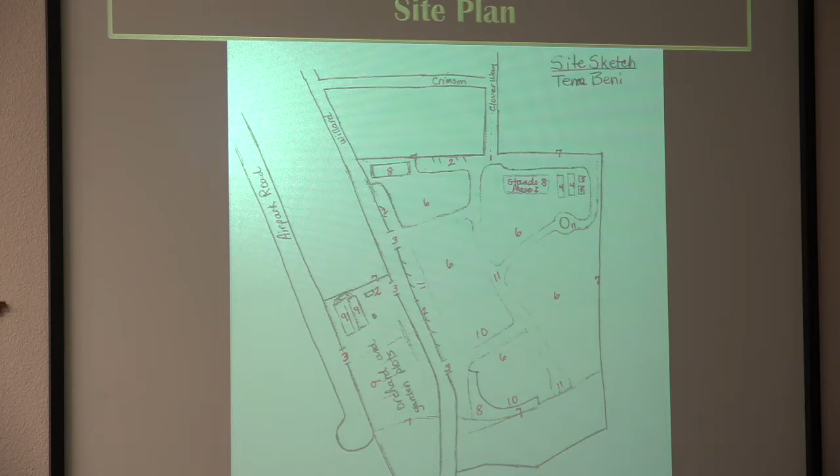So there is pretty significant overgrowth that's still occurring. That concludes what I have to say. As I said, the applicant has stated she would not be here this evening, and would rather come back to you with more of an update in November or December. That's the information I have, and I'll pass it on to you — available for any questions.

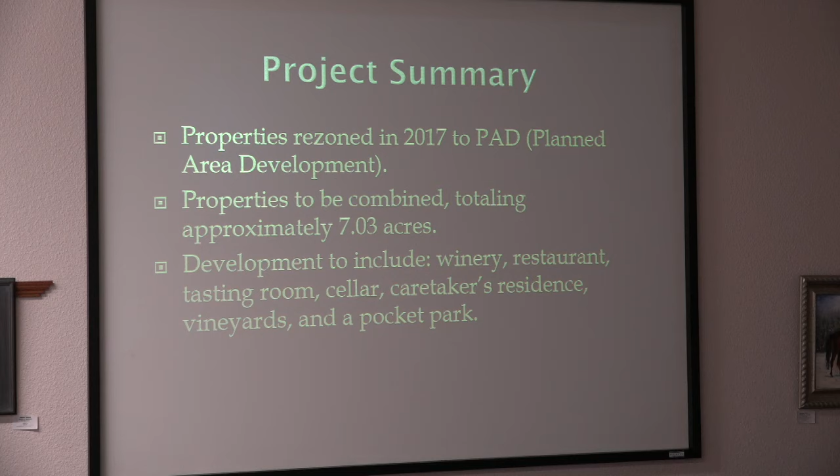Right now it does consist of 2 parcels, this larger one here and the smaller one down here on the corner. They will be combined before the project moves forward. It's approximately 7.03 acres once combined. The project will include a winery, a restaurant, tasting room, cellar, caretaker's residence, vineyards, and a pocket park. That pocket park would be down here, kind of in the corner below the hill where you see the other parcel. It's going to have 2 containers for ice cream, gelato, coffee, and places to sit down there for customers.

As I mentioned, they're going to reuse portions of the existing building. Vehicle access will be from the existing driveway along Verde Heights, which will be improved to required standards. They have 76 parking stalls on site, including 1 down below for ADA at the pocket park. It does exceed the requirements of the parking ordinance. They will provide walking access to the restaurant from Old Town via a stairway through the terrace vineyards, and also an incline lift will provide access from the pocket park to the restaurant.

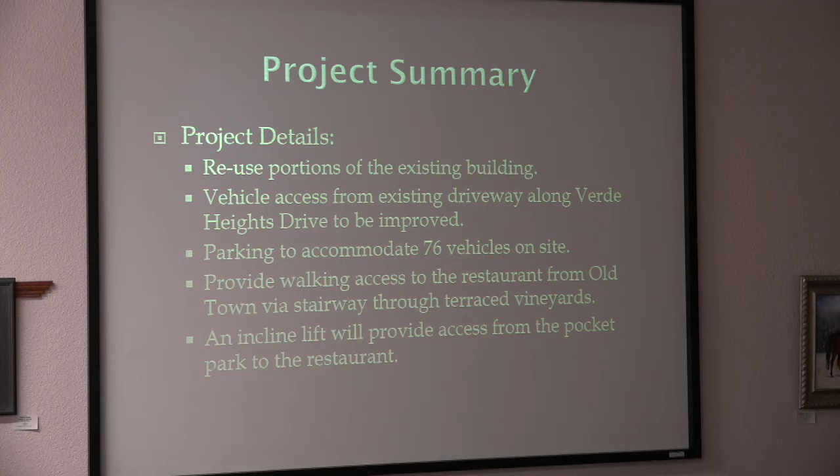There will be a walkway from the top of Verde Heights to Old Town that's still being discussed between the applicant and the staff, the city engineer. Right now there's talk about allowing public access through the property while they're open. When they're not open, during their hours of operation, they're closed. There's no easy access from Verde Heights to Old Town, so we're still trying to figure out what that is going to be. That is a stipulation on the staff report if you choose to approve it tonight, that they get that figured out with city staff, with the city engineer, to accommodate that public access.

The off-site improvements will include curb and gutter along Verde Heights. That's the extent of the improvements that are required. Unfortunately, the city engineer was unable to make it tonight. He had planned on it, but he just couldn't be here. So it will be curb and gutter, and again that other walking path, it's not necessarily going to be a full sidewalk. Again, they're going to work that out. So that is the extent of improvements on Verde Heights Drive that the city engineer can require.

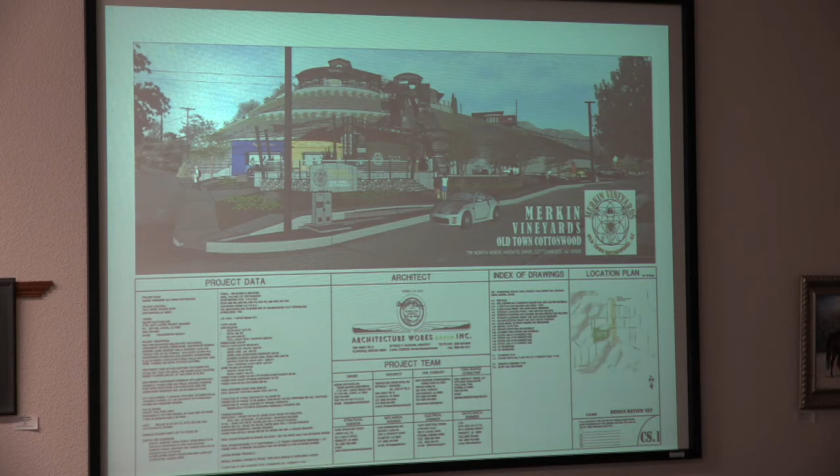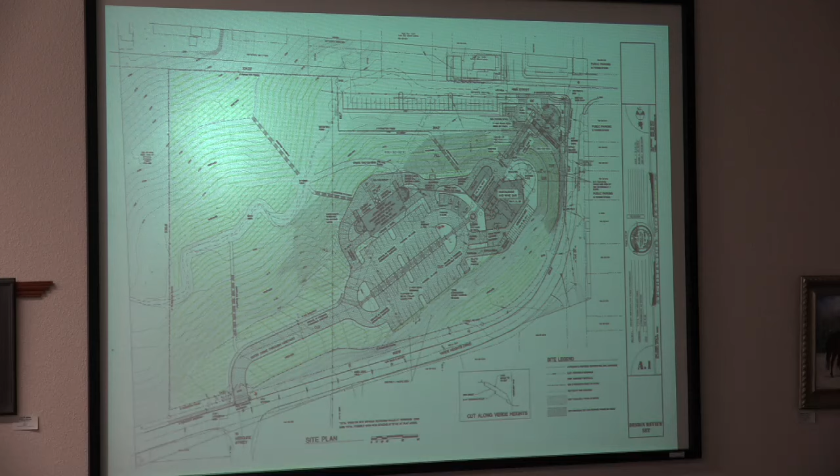Site plan showing the layout of the property with your pocket park down here on the corner, the incline lift coming up here, as well as the stairway, the restaurant in this area with the greenhouse, parking throughout the area over here, the access up Verde Heights up here on top of the hill.

I would like to also point out on their landscape plan, this area right here is extremely steep. It's not very easy to plant anything in that area. Had it been, they would have shown that. They will be landscaping the majority of the frontage along Verde Heights up here, along the entrance here, and there will be around the rest of the property over here as well. It's just this area right here is very, very steep. They're gonna leave it mostly natural as much as they can, but they just can't go in there and plant anything. The applicant is here tonight, and they can go into more detail on that if you'd like.

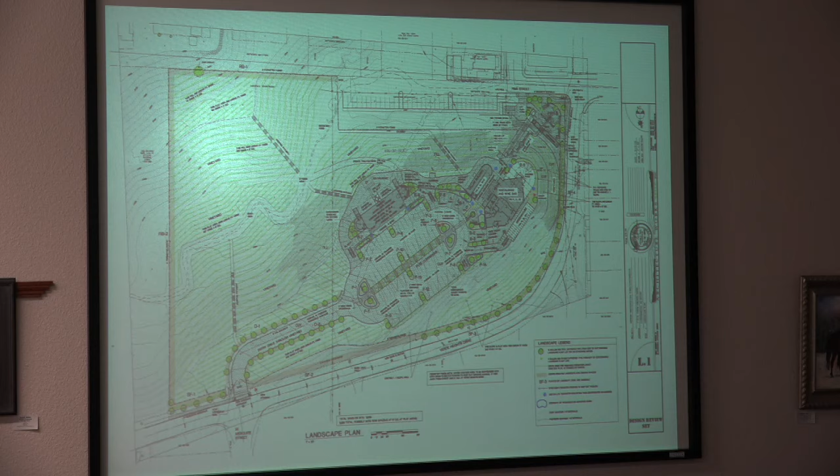There will be terraced vineyards throughout the hillside through here, around over here, on the backside, looking at as much as they can on vineyards there. Try and collect as much rainwater as they can for irrigation, and also using city water as well.

That's kind of a little layout floor plan of the restaurant area, the greenhouse over here. Caretaker's residence to be over here with the winery. And down here is the pocket park in this area.

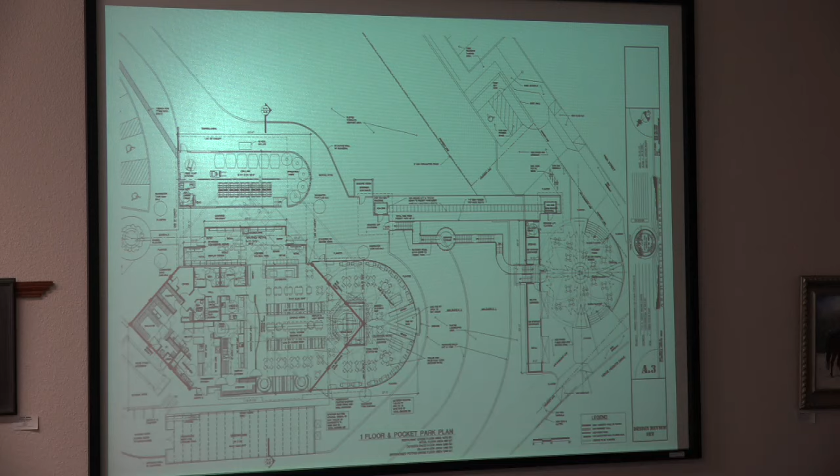There will be a sidewalk on the corner down here that goes around up to a portion of Verde Heights right there, but after that, they can't extend it up there due to the nature of Verde Heights Drive.

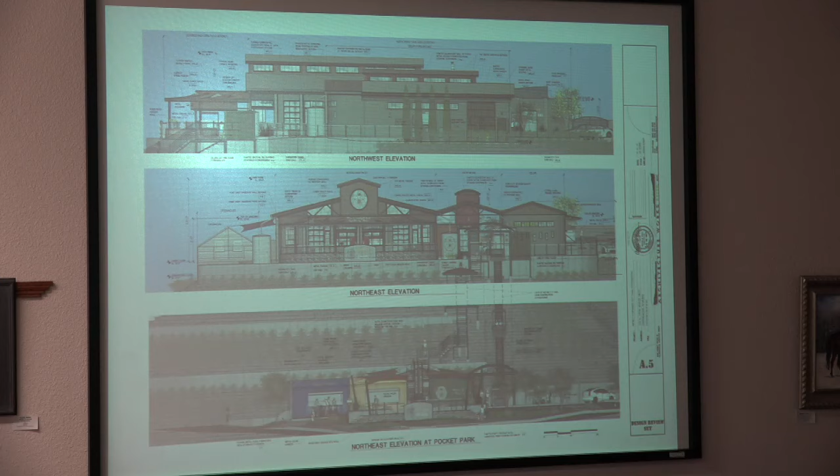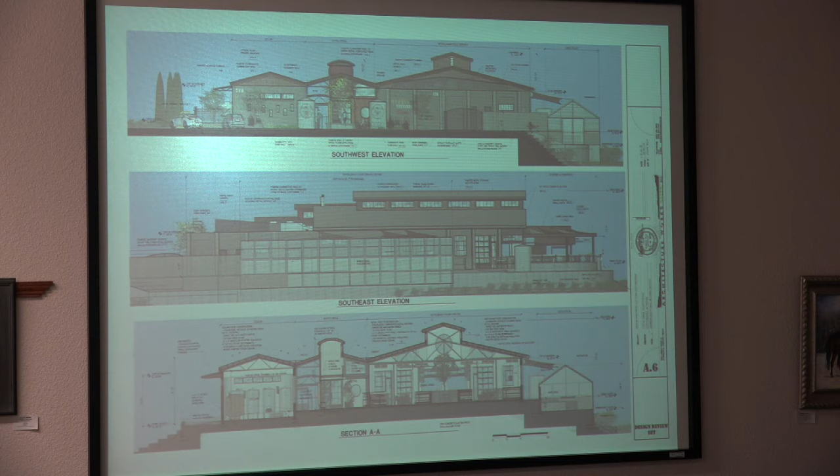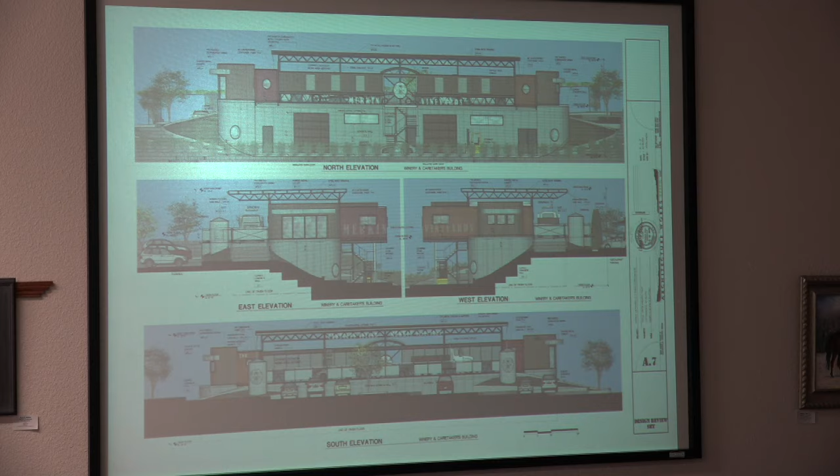And other north and west elevations, and then also on the east and south. That's the winery and caretakers building, elevations on there.

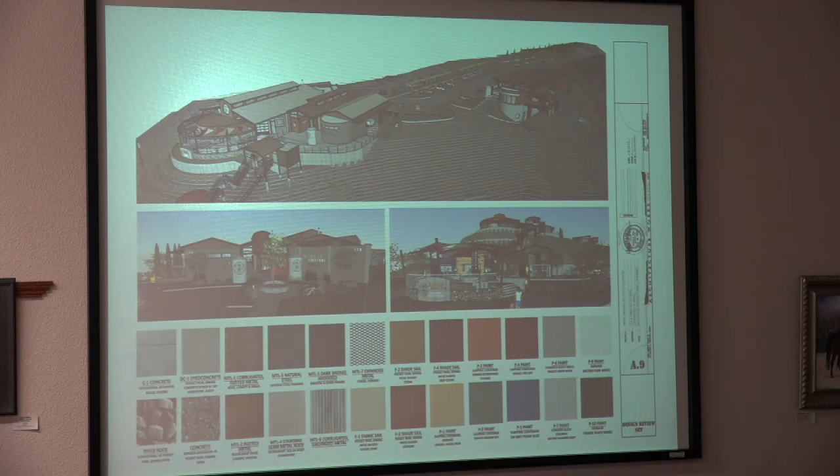That's their renderings with their color palette. They do have samples, material samples here tonight. If you'd like to see them, we can get them passed around to you. Also their boards here to view.

Their signage, staff is still looking at it to determine if it meets the sign code. There's some questions that we need to sit down with the applicant to determine what their uses are versus what they're allowed. So we're gonna sit down with the applicant, go over that so we can accurately determine what they're trying to do, what signs they're allowed to have, and if they're over or under, and where those signs could be placed. So we've got a lot going on there right now, so we just want to ensure that what they do meets code, because they are allowed a certain number of signs per use, not necessarily per property, but per use, and they will have multiple uses on this site.

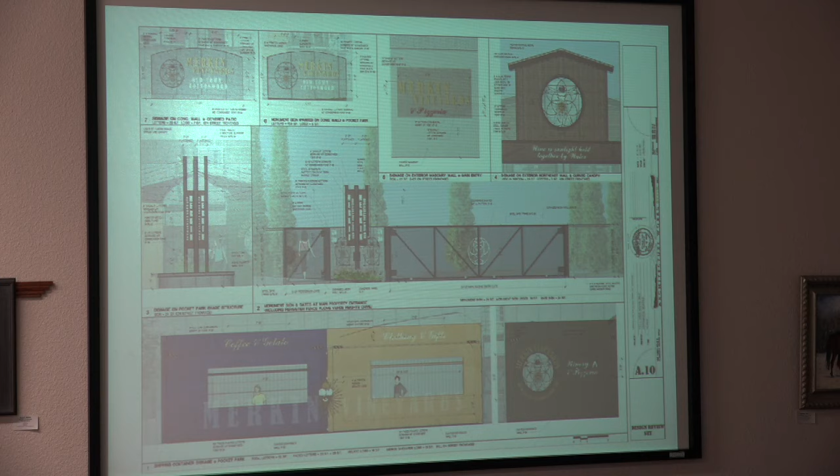Again, some examples of the signs that they might use on the containers here, on the entrances.

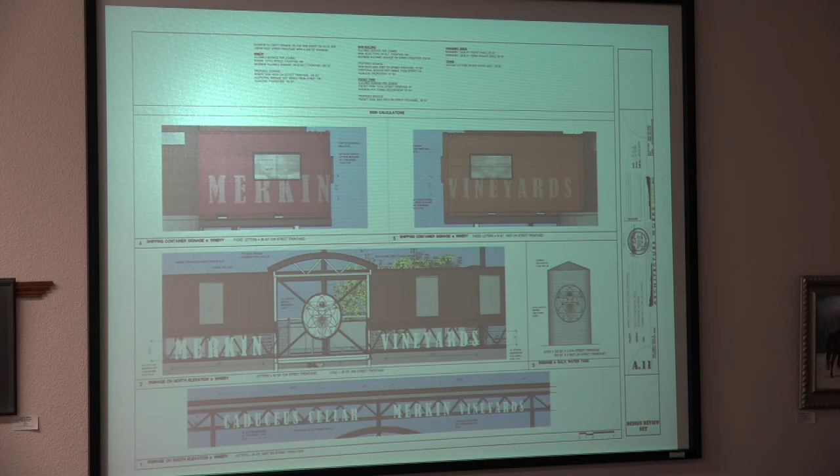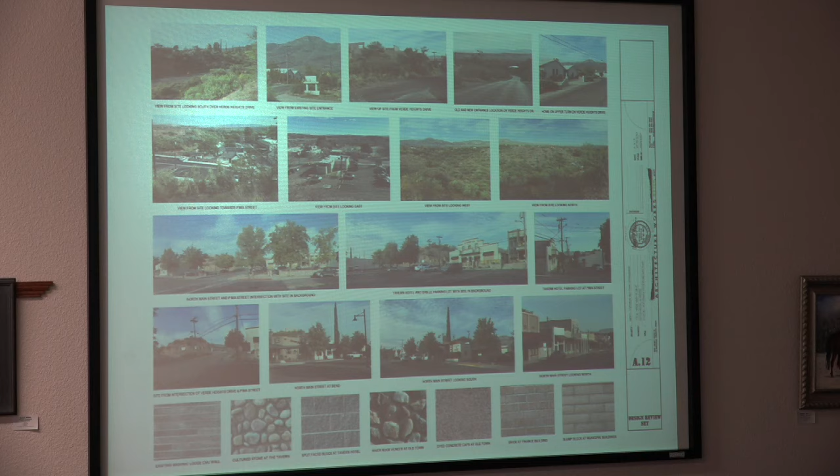There's some before and after looking from Main Street. That's what it looked like before there was some demolition on the property, and then what you would see after completion of the project.

This project is proposed to be phased over the course of the next couple of years. Back in August, the Planning and Zoning Commission and City Council granted an extension, a phased extension of this project timeline to go to, I believe, March of 2022, or it might have been June of 2022. But it gives them a 3-year phasing plan on this to complete the project.

There's another before and after view looking at it from Cactus Street. This is the view from Verde Heights, before and after. There's the entrance gate here.

As you can see, this fence, this 8-foot fence that they're requesting to go around the property here for protection. Another photo from Main Street.

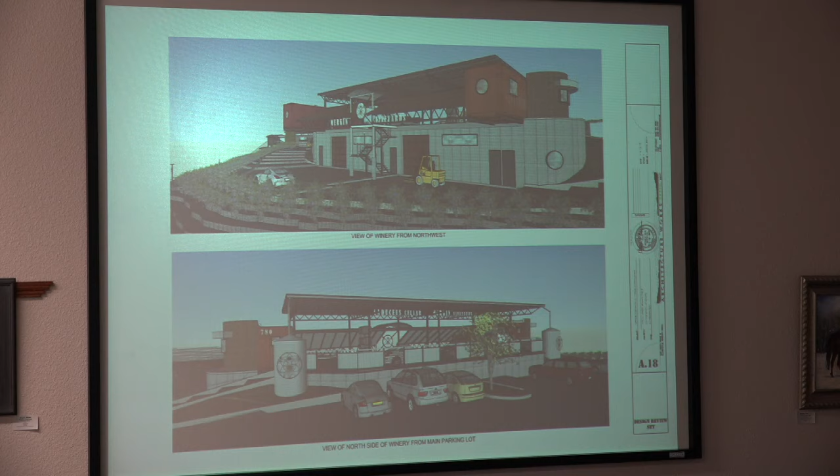This is the winery view from the northwest and from the parking lot. And that's again the fence elevation from the perimeter fence around the property.

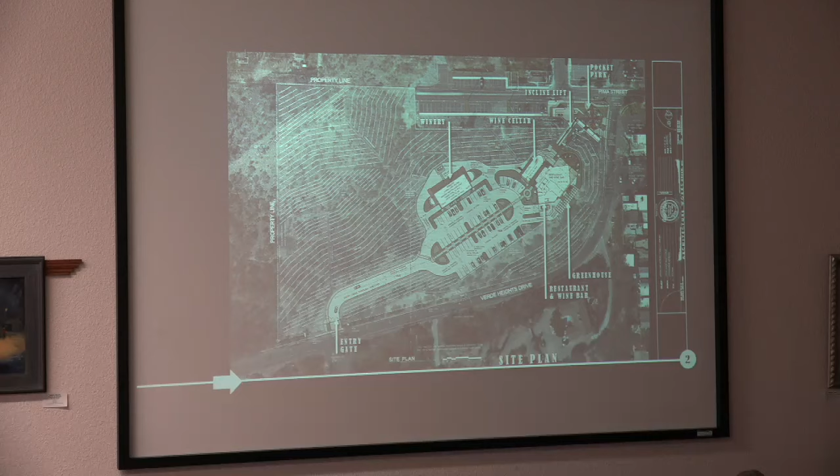Let's go to the next slide. So the site plan, we've highlighted the boundaries of the site here, as Scott showed you. The entrance, the main entrance to the property is here. Today, the main entrance is here.

So we are planning to move the entrance opposite Mesquite Drive so that the traffic is more head-on as people come out of Mesquite and people come out of the parking lot, and they aren't offset. So we're moving the monument sign as well, replacing it with a new monument sign at the gate.

Before we go into the property, I want to talk about the vineyard and the planting that will go on most of the acreage. Matt Lavore is here to address the fencing with you, as well as the improvements along Verde Heights Drive. But in order for the vineyard to operate correctly, it has to be fenced.

The fact that we're in town complicates it somewhat, in the sense that the fence has to be higher in some areas than regulations allow. The reason is deer and raccoons that will climb over a 6-foot fence, and if the grapes are not protected, there's no harvest, there's no wine, and the project doesn't work very well.

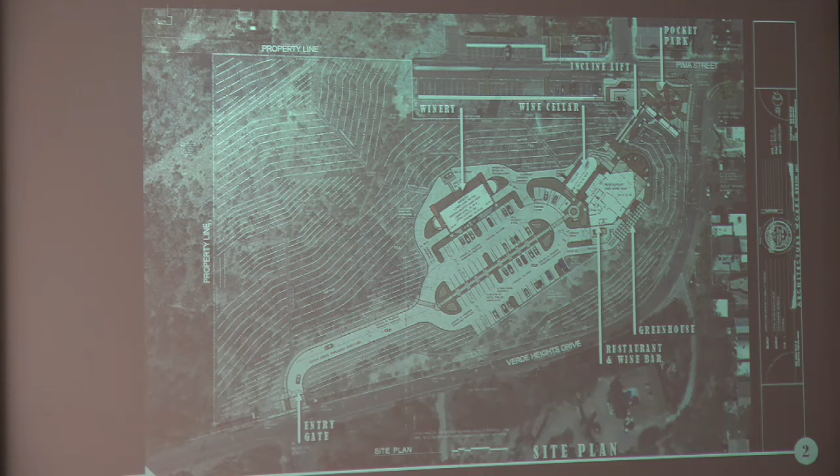The wine cellar is adjacent to the restaurant, and it's a building for fermentation and storage of the wine. So there's no real production going on here - no crushing, no heavy equipment in and around that building other than a forklift to move barrels. But the wine cellar will be visible through a glass wall facing the restaurant.

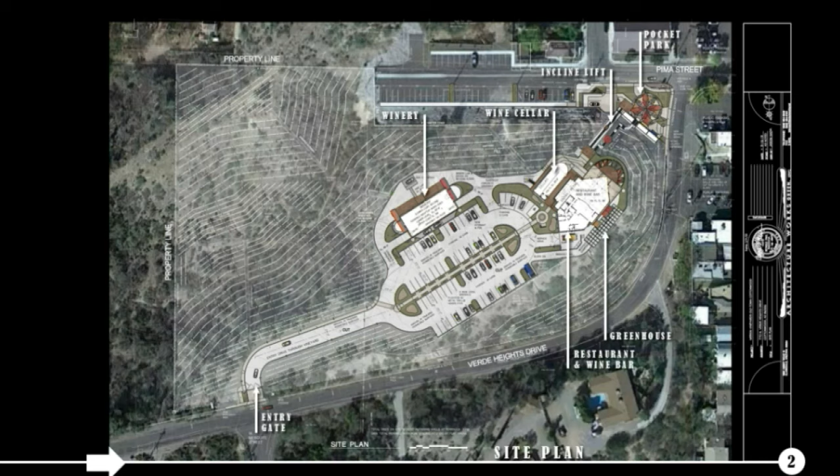Once you walk through the passageway, you're out in the open with a broad view of Old Town and the landscape beyond. There's a patio here, mostly covered, which allows for food, drink, and sitting. It will be fenced or contained so that people cannot walk around the property with glasses or bottles of wine.

Once you come through this area, there's an incline lift that will lead you down to the pocket park, which is accessible from Pima, Verde Heights, and Old Town. The pocket park is open to the public for sitting and eating and drinking, and there will be some retail down there. For those who don't want to use the incline lift, there's a stair adjacent to it that will take you either up or down.

Also on the site, adjacent to the restaurant, we're proposing the food production greenhouse. We have it on this side of the property because of the more southern or southeastern exposure - any other location wasn't as conducive to growing and use of the greenhouse. We also wanted to keep that work close to the restaurant, and the service area, the commissary kitchen, is in this area of that building.

So on this side of the site, we are proposing a production winery. It's a 2-level building, and in it there would be a caretaker's residence on this end of the building. The main production is mostly here in the center, and on the far side is a lab for the winery and wine production.

This building is accessed through this loop-around driveway, and it also has a driveway going over to the cellar where the wine will be stored. There will be piping underground to move the wine from this building to that building, so you're not taking large barrels in a truck, but it will be pumped from one building to the next.

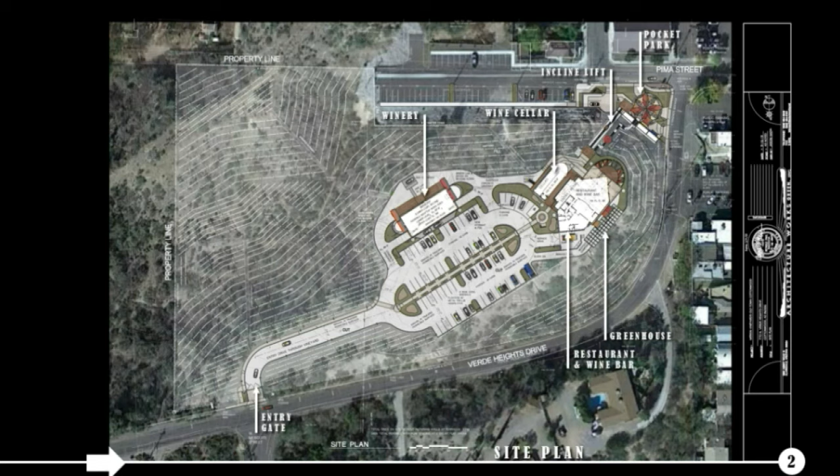That, in general, gives you the broad overview. Let's go to the next.

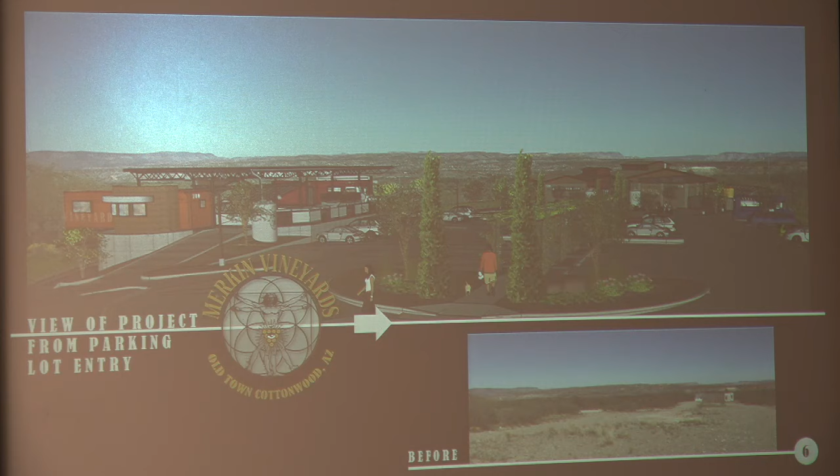Here is the 8-foot-high fence, and it dead ends into a fence required by state law for the incline lift. That incline lift is fenced on both sides with a minimum 7-foot-high fence, which is a state law requirement, so that nobody hops the fence to jump on the incline lift at 12 o'clock at night.

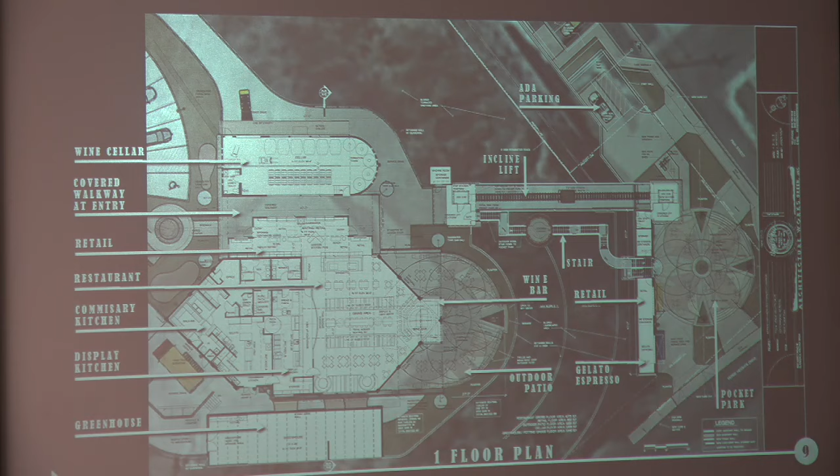We are proposing that the walls of the building remain in the same vernacular that the Masonic Lodge was, that 4x16 block. So we will be building the building out of that same material. The color—that block was not painted, at least I didn't recognize it as paint—but we will be painting the block, and it'll be in the 4-inch block, not the 8-inch block, which is more typical.

For these buildings here, that vernacular—exterior steel, concrete block, concrete—is going to be the material of choice. The greenhouse is prefabricated, a galvanized structure with polycarbonate glazing, and it will be sitting on a poured-in-place concrete base. The prefabricated structure is this gabled structure here, and this is the poured-in-place concrete retaining wall to have the structure sit on.

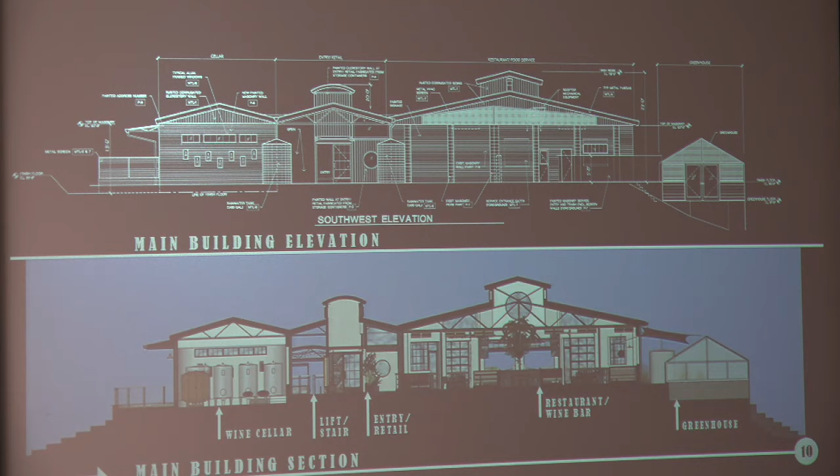Adjacent to the entrance, there are 2 rainwater collection tanks, and we are intending to collect all the rainwater off of all the roofs for part of the irrigation for the landscaping.

A lot of the finishes on the outside, besides the concrete block, are going to be rusted steel—that brownish copper look that you see with typical galvanized, corrugated rusted steel will be part of the look. The containers, as we know, are steel by nature, but they'll be painted.

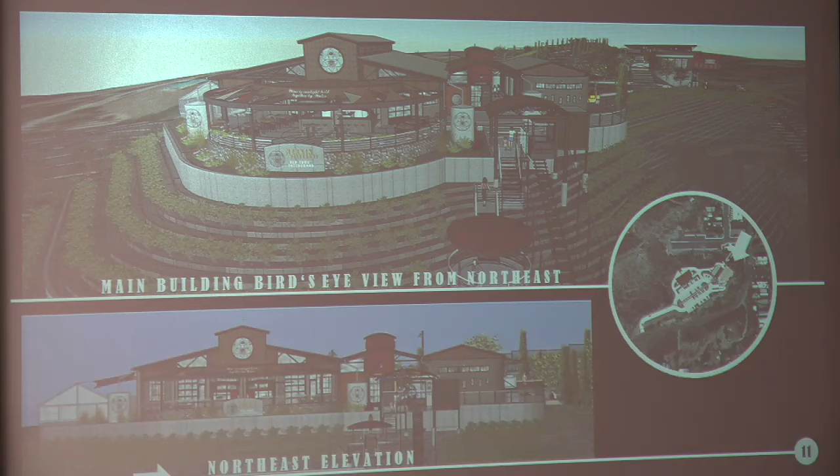A view of the entrance, again the restaurant, this is the kitchen aspect, and so these two walls are standing today. They were part of the Masonic Lodge, and the front side of this building has two walls standing, which you probably saw up on the hill, and they will remain and be part of the wine bar. So we tried our best to maintain what was salvageable out of that building, and I don't know if any of you saw what had happened to that building over the many years of being vandalized.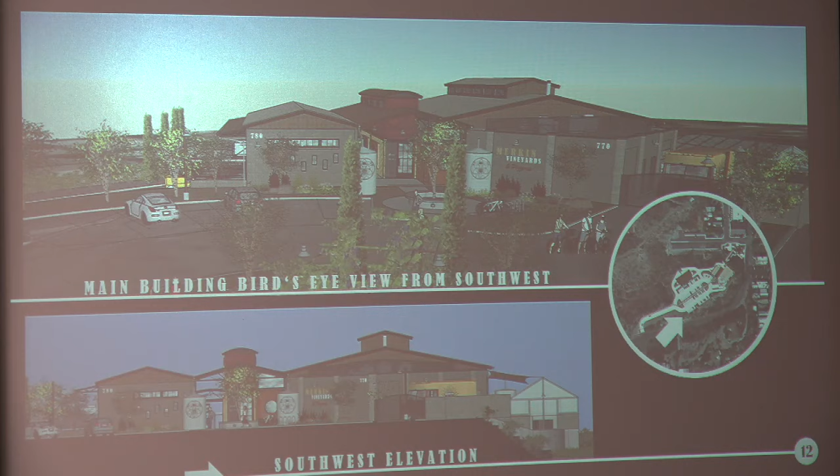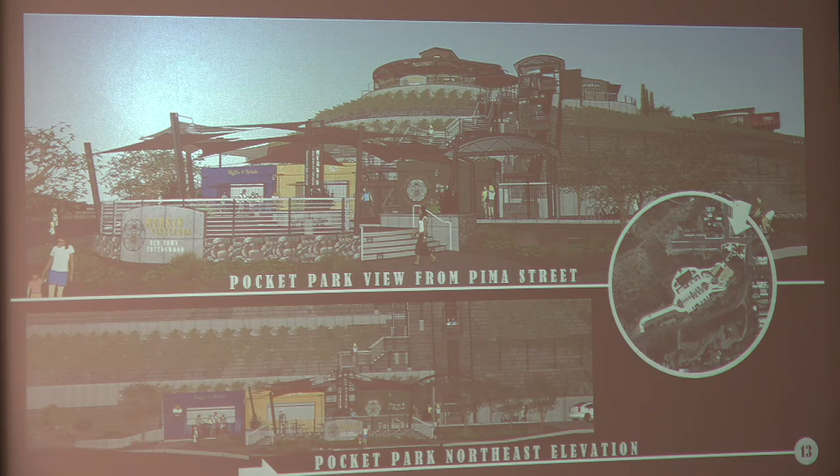Another bird's eye view looking, you'll be able to see the greenhouse here. We have a couple more rainwater collection tanks here. The entrance or exit to the incline lift here, and the stair coming up. And this is the patio.

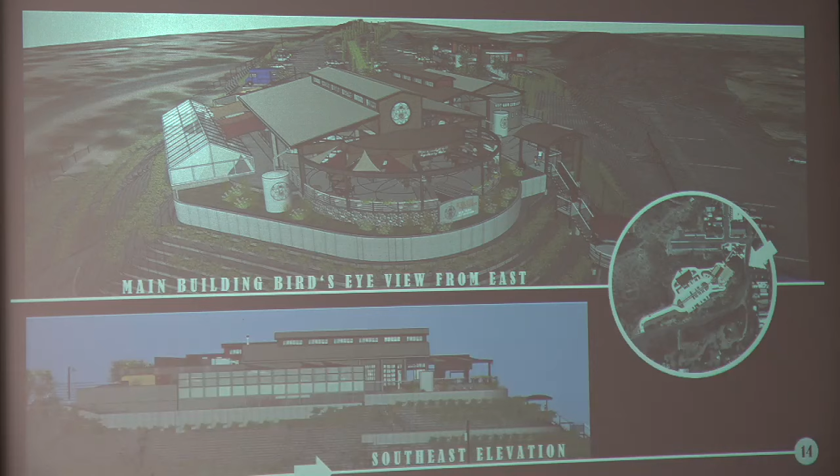And more of a view of the winery over here, and that crush pad up on the roof here. This lower level is accessible not only to car access, but also fire department access. We had both the chief and Rick and John and folks from the fire department at our office multiple times as we've designed this project, making sure that what we were doing they first of all approved of.

And so the buildings reflect some of those conversations.

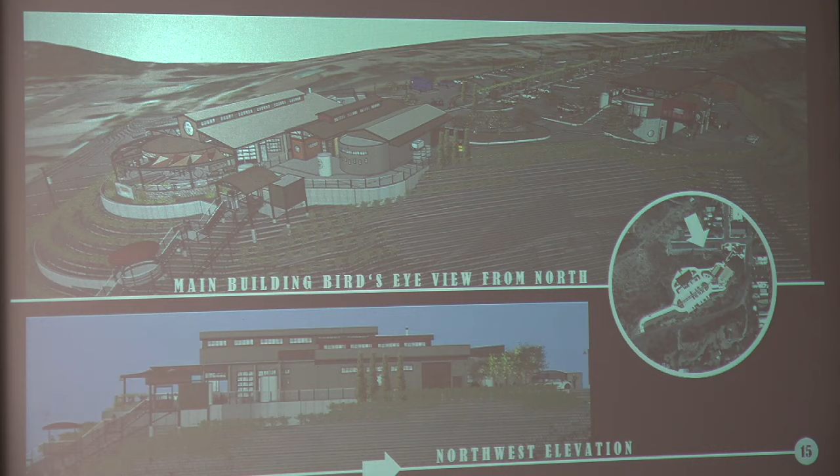This is the winery, and this is the lower level, so you'll be able to drive from the parking lot around the winery and back up to the cellar or back out to the parking lot. The main production area is here, and this building is all poured-in-place concrete. So the walls, the floor, the roof of this building is poured-in-place concrete, so that is the look of that building, which again is both historic and modern.

There will be a staff area on this end, and on this end there's more production and a staircase going up to the lab. And you could barely see the outline of those containers that are going to project out up on the second level here. There is an ADA parking spot here.

This back wall is about 14 feet into the hill, so it's a large retaining wall. From these drawings here, you can see that lower level. There will be a staircase right here that goes up to the roof deck, which is right here.

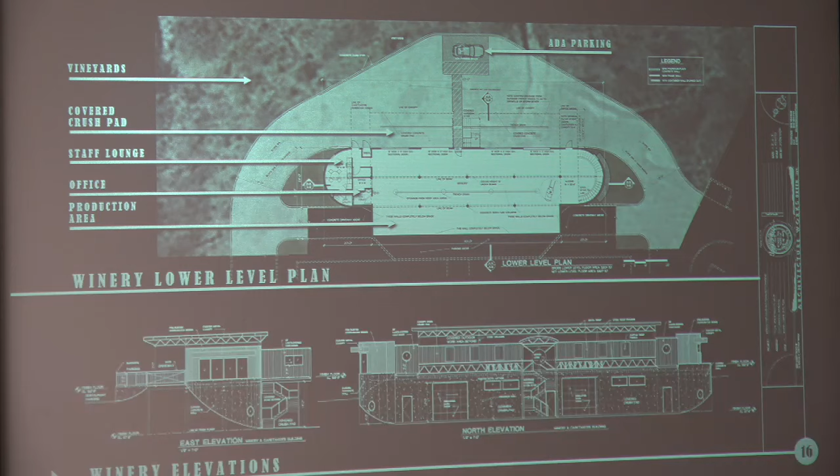This is the roof deck, so instead of taking the driveway down and around the building, you'll be able to drive up here. It is gated, and you'll be able to drive onto the roof of this building. Adjacent to it are 3 parking spaces for staff working in the building, plus this ADA parking space down below. This is a covered roof deck, as you can see the roof covering here, and this is open air.

And there will be these openings in the roof so that the fruit, once it's crushed, can be directed down below to the fermentation tanks below.

This portion is the caretaker's residence, and there will need to be someone living on site full-time, 24/7, 365 days of the year. So it's a 1-bedroom apartment, and on this side is the lab and an office for the winery.

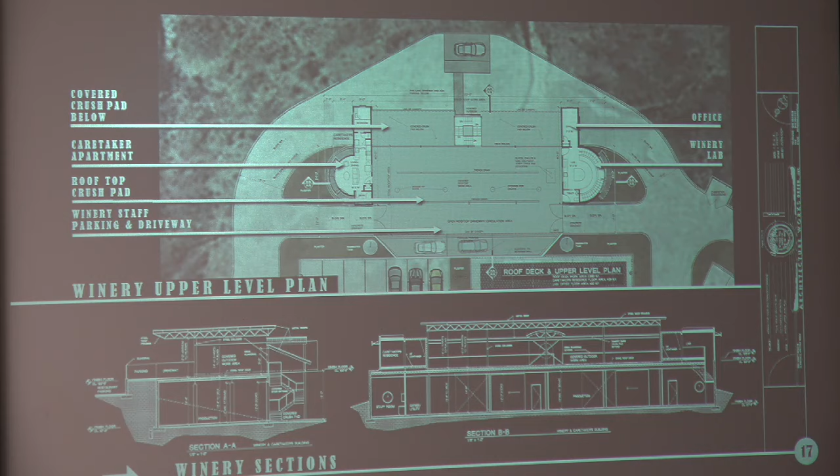We also, back up just for a second, there's another dumpster area here which will serve this building. I didn't mention there is also dumpster recycling at the service entrance to the restaurant.

This is another shot of the winery, the roof level. The public parking is down here. We've got 2 rainwater collection tanks taking water off this roof. And this is that steep driveway coming up to the roof itself. And then there's some parking behind this fence for the staff that work in the winery.

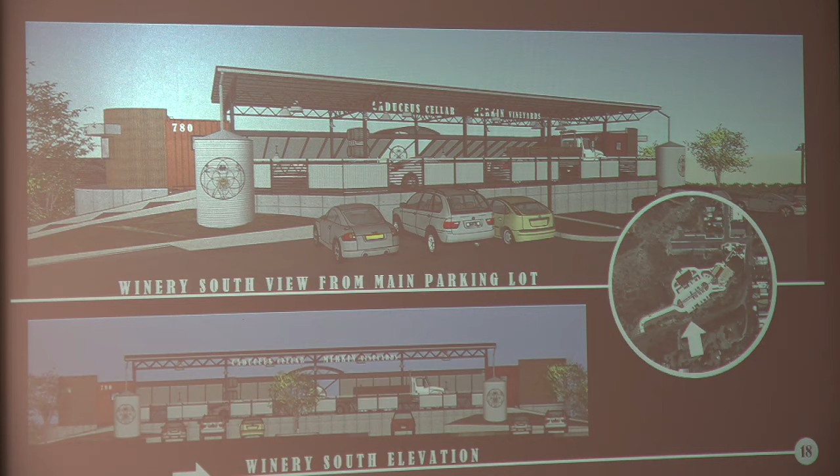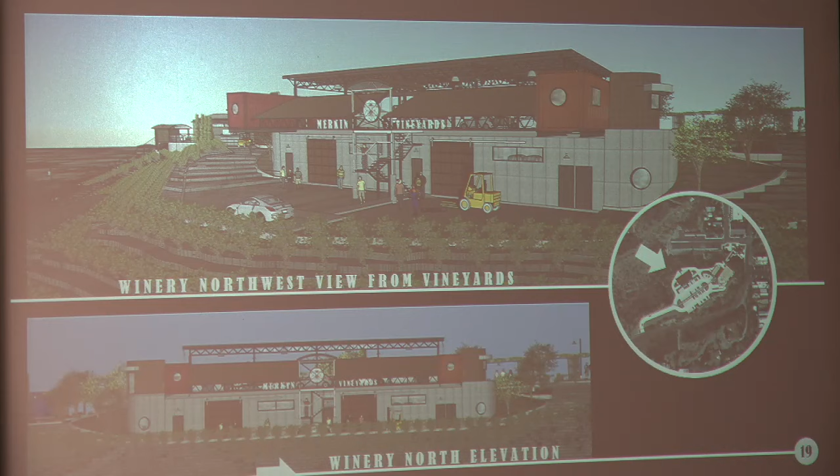Next, a view of the winery from down below. You can see these 2 cantilevered containers, large garage doors allowing access into the production area of the winery. And that's the roof deck on top.

The fire department has, obviously we haven't done construction drawings, but by reviewing these drawings has approved the grades, the widths of these driveways that we're proposing here tonight, the width of this driveway going up, et cetera. So they were feeling comfortable with access to all the buildings that we're proposing.

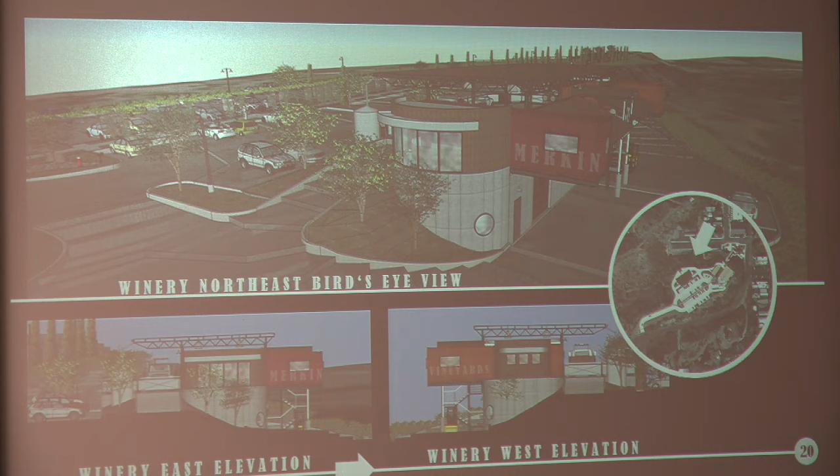Again, more of a bird's eye view.

There will be a dump station here at the service entrance to the commissary kitchen for Maynard's food truck, but the food truck will not be selling out of that parking lot or off that site, so it will only be there to be serviced, to restock, to empty, to load, etc. We've designed this area large enough for that food truck and the trash truck to go in. So there's a dumpster here, there's recycling, compost, and three compost bins as well.

And that compost has to do with the production, food production in the greenhouse.

This walkway, which will be open to the public, is covered. There is a trellis, a steel trellis, going along this entire walkway, where our landscape plan shows, I believe, wisteria or jasmine growing on this trellis here, not grapes.

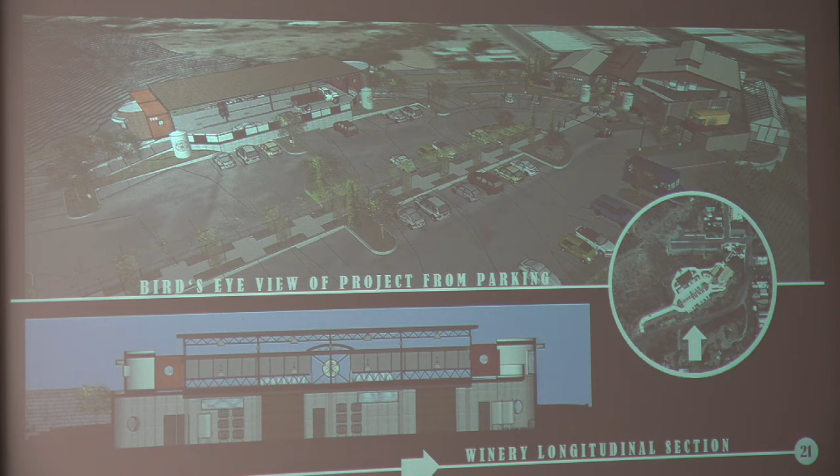Next, our color board here, and I'd like to show you the alternative parking material we're talking about, and I have a piece of the fencing. Let me finish the slideshow, and then I can show you these, and we can focus more on that.

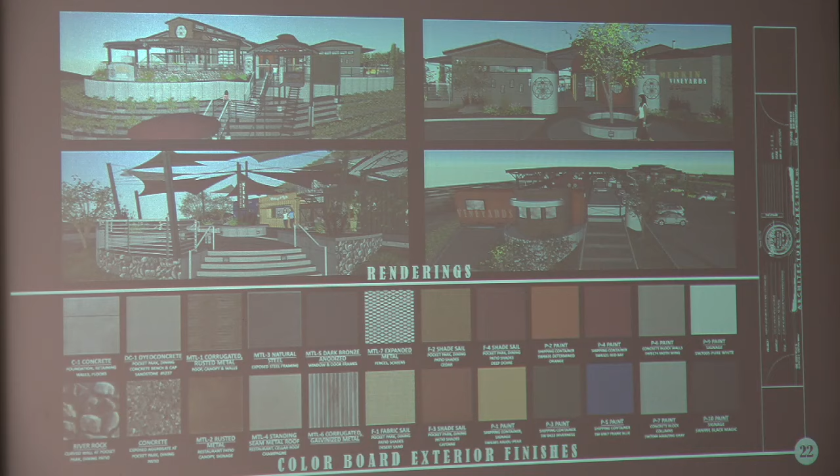I'm going to let Krishan talk to you a little bit about the grading, because the grading for the site is the major portion of what we actually will be grading here. As I mentioned earlier, this portion of the site where the major part of the vineyard is, we're wanting to do with hand equipment. So I'll let Krishan talk to you briefly about just the grading.

Krishan Ginige with SCC. As far as the grading is concerned, what we've taken into account is the steep slopes, but at the same time, what we've looked at is the general slope of the entire site, which is about a 2-to-1 slope. It changes in certain places, but that is the general slope.

So we are going to use that existing slope terrain, and since there's a 2-to-1 slope in most of these areas, by creating terraces we can still create the required terrace while being as close as possible to the existing grade. So in very simple terms, that is the concept we are proposing.

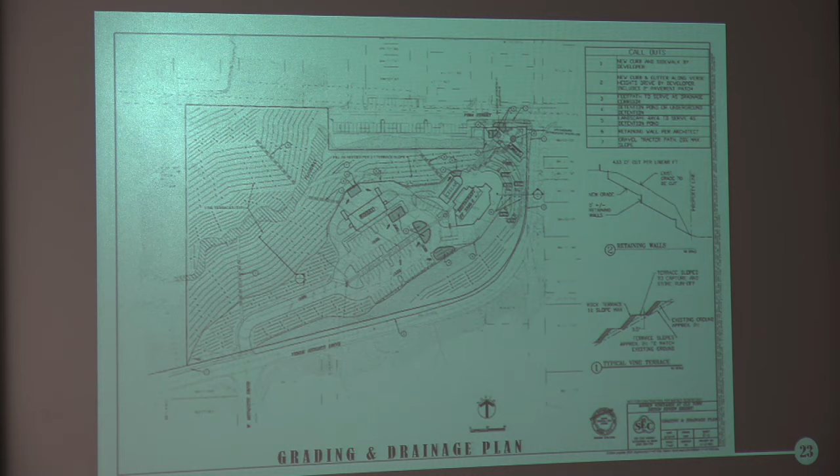So in a way we are reducing the runoff that's going to be coming from this side to the existing sidewalk. When we did the design for this parking at the previous project, we did take into account the existing drainage at full capacity, knowing some of the challenges we had with drainage flowing into Old Town. I believe this is going to be an added benefit to some of the flooding challenges, mitigating them up to a certain point. So in very simple terms, that's the concept we have. I'll be happy to answer any questions if you have any.

Yes, regarding along Verde Heights Drive—Collins mentioned that the grading is not conducive to putting in a sidewalk or a path, but with the additional traffic you're going to generate up there, it seems to me that would be... what would be the real challenge to do a 5-foot path inside that curb? What really would be the challenge, with some kind of terracing wall or something? Is it really that monumental a project to do?

Along Verde Heights, there are a number of challenges - obviously the terrain, and then getting into the sidewalk. Anytime we try to excavate in this area, that already steep slope becomes even steeper, so that's one of the challenges. This is open for discussion. We have challenges like the grading, the sidewalk might be something to be discussed, and also drainage. All those are items we intend to discuss with the town city engineer and try to come up with some resolutions.

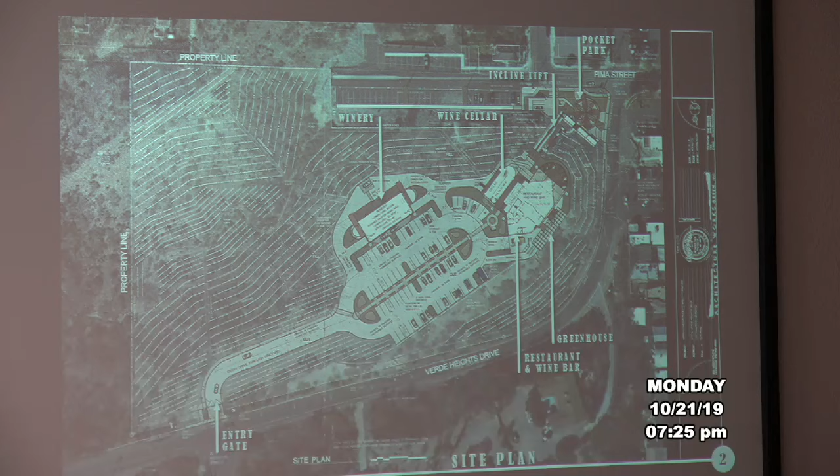So Phase 1 is what we're calling grading, general grading of the site. This area here will be graded as well. There's about 6 feet of material—we're going to reduce the height of this area and push that material into the parking lot area. So there's quite a bit of grading in this area, having nothing to do with the vineyard planting.

The second thing we intend to do, Phase 2, is the winery. Maynard wants the winery built, and in doing so, this building will be started, but right behind it will be this complex here. So one is the grading, two is this winery, three is the restaurant, the wine cellar, et cetera.

And with that, the parking lot has got to go in. The last bit of the project we're proposing to do is the pocket park. So we're proposing this over a 3-year period.

Generally, that's it. I gave the breakdown to Scott. I don't have the month-to-month breakdown, but just so you have an overall picture of how we're intending to proceed. It's item 7 in your LOI.

Okay, great. And I think we're proposing that the grading start in March, this coming year. We're going to put some pressure on Krishan to get that done. And while the grading's going on, we're going to work on the construction drawings for the winery, and for the entire project, with the intent of permitting this building first.

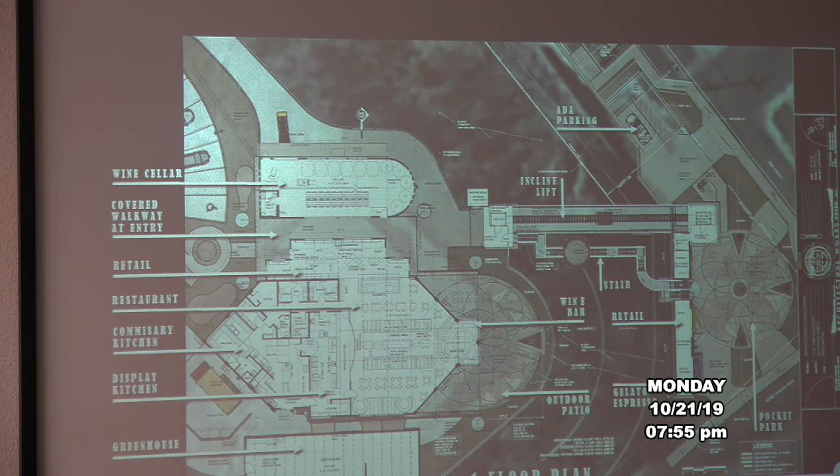We could, right now we have these 3 planters here, here, and here, and then the center planter, which is really the main structure holding up the cables for these sails. We do have these planted, but not in trees, but we could look at these 3 areas. We have street trees along here and here, and street trees going up Verde Heights. So we're not short on trees, but we could look at the possibility of adding something, even if it was just a few, to maybe reduce the shade structure. Just a thought.

I mean, I understand why you went to this. It's the non-organic thing, and getting something leafy in there. We did look at that, I gotta tell you. We looked at it pretty hard. There's no doubt in my mind you did, because this is unbelievable. But just a thought, just my thought.

We spent a lot of time on it, and what we found is that not only would we wait a number of years for the shade, it wouldn't be effective in the winter necessarily unless they were conifers. Then it's like, do we want a bunch of pine trees in there that really don't provide what you need? Well, there could have been some live oak or something else. I get it, we tried that as the first option.

Last question, because I'm ignorant to this: how long does it take from the time you plant the grapes to production, like you're actually using them, making wine from those grapes? The shortest possible time is 3 years. You will get something in 3 years, you just won't get the full 1.5 tons per acre the way we crop. Usually you reach full crop tonnage by 5 years. Okay, thank you.